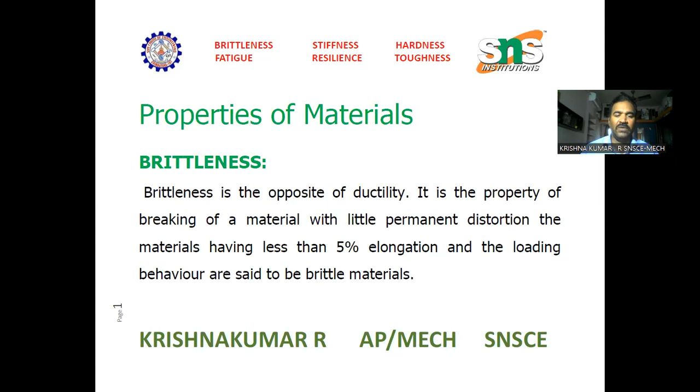Brittleness is the opposite of ductility. It is the property of breaking of a material with little permanent distortion. The materials having less than 5% elongation under loading behavior are said to be brittle materials. In this image, you can see brittle material.

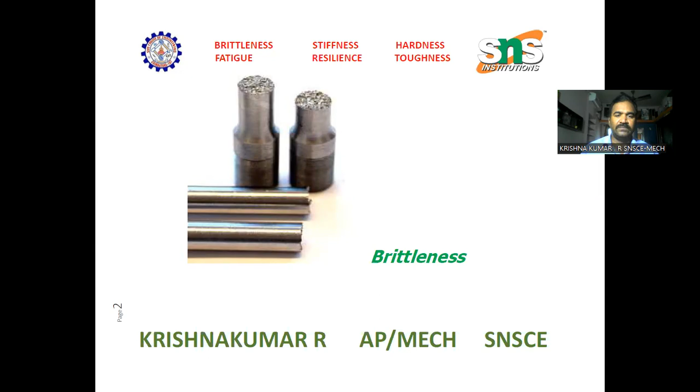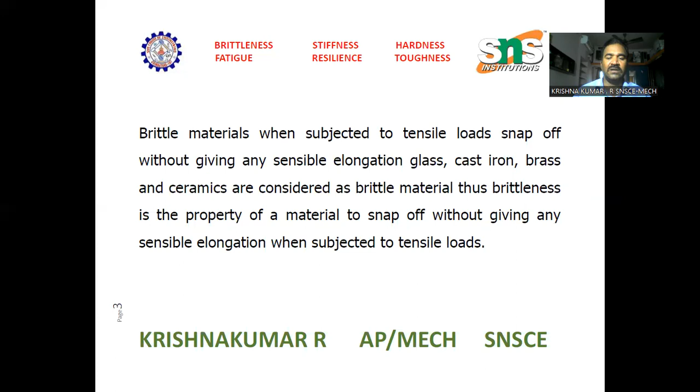Brittle materials when subjected to tensile loads snap off without giving any sensible elongation. Glass, cast iron, brass, and ceramics are considered brittle materials. Thus, brittleness is the property of a material to snap off without giving any sensible elongation when subjected to tensile load.

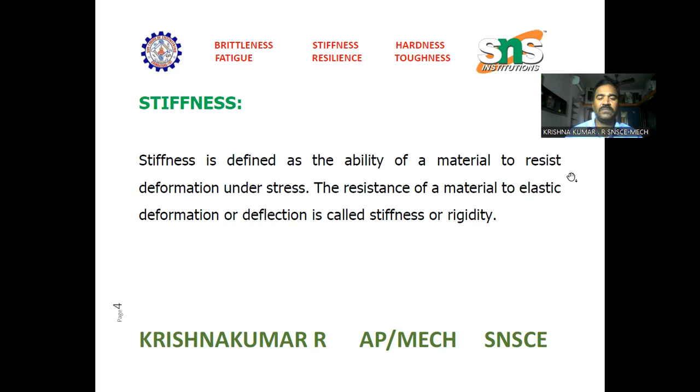Then stiffness. Stiffness is defined as the ability of a material to resist deformation under stresses. The resistance of a material to elastic deformation or deflection is called stiffness or rigidity. In this image, you can see stiffness material.

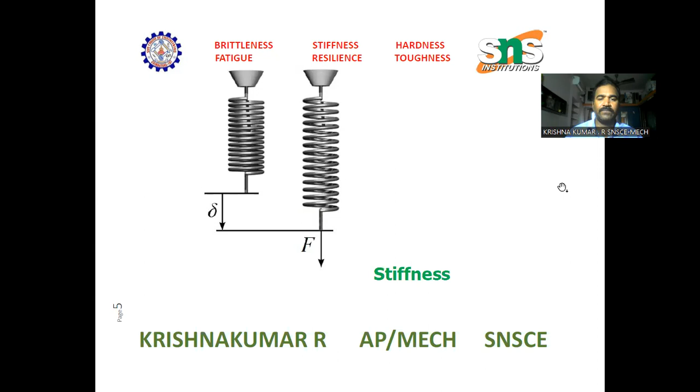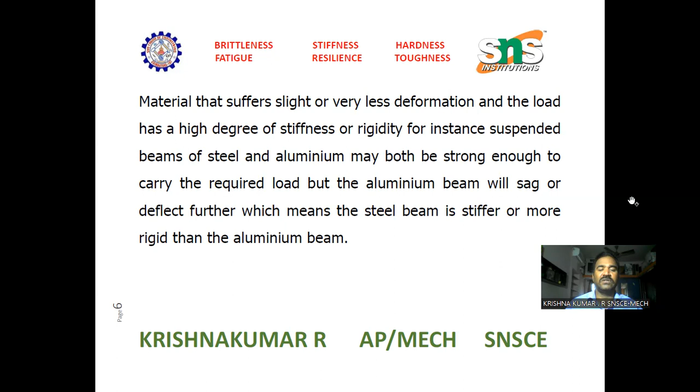Material that suffers slight or very less deformation under load has a high degree of stiffness or rigidity. For instance, suspended beams of steel and aluminum may both be strong enough to carry the required load, but the aluminum beam will sag or deflect further, which means the steel beam is stiffer or more rigid than the aluminum beam.

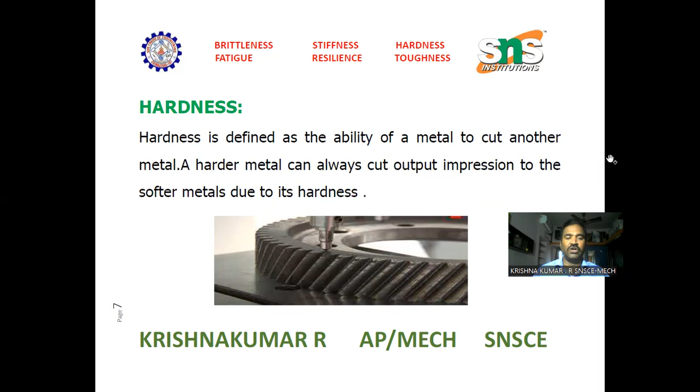Now we are going to see hardness. Hardness is defined as the ability of a metal to cut another metal. A harder metal can always cut or put impression to the softer metals due to its hardness. It is a very important property of metals and has a wide variety of meanings.

It embraces many different properties such as resistance to wear, resistance to indentation, resistance to scratches, resistance to deformation, and machinability, etc. Diamond is the hardest known material naturally.

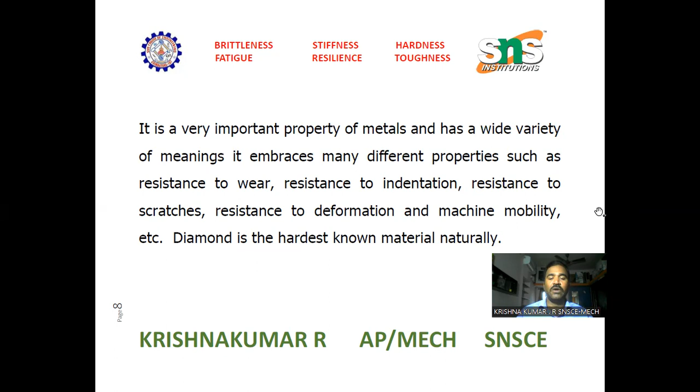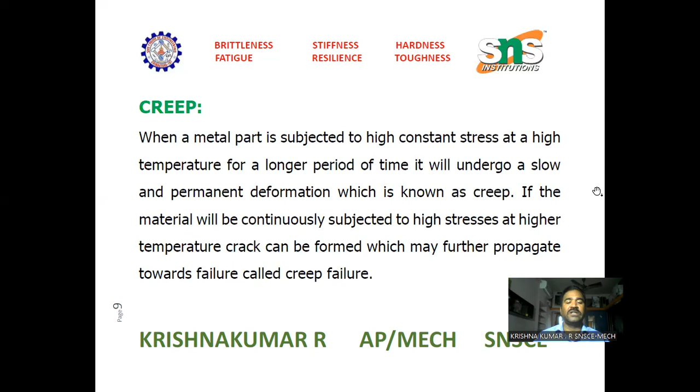Now we are going to see creep. When a metal part is subjected to high constant stress at a high temperature for a longer period of time, it will undergo a slow and permanent deformation, which is known as creep. If the material is continuously subjected to high stresses at higher temperature, cracks can be formed, which may further propagate towards failure called creep failure.

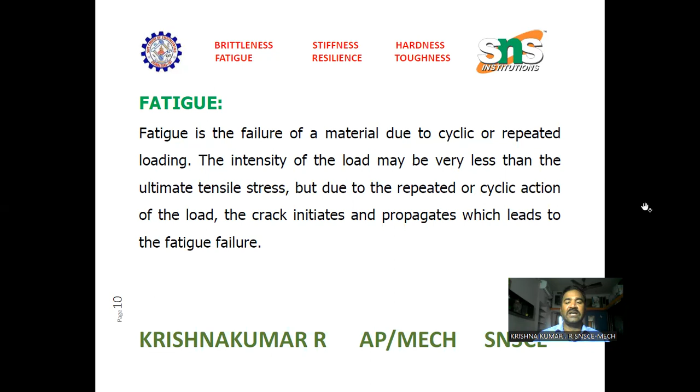Fatigue. Fatigue is the failure of a metal due to cyclic or repeated loading. The intensity of the load may be much less than the ultimate tensile stress, but due to the repeated or cyclic action of the load, the crack initiates and propagates, which leads to fatigue failure.

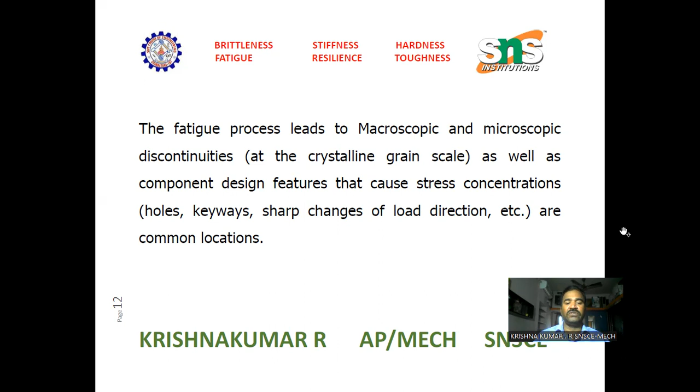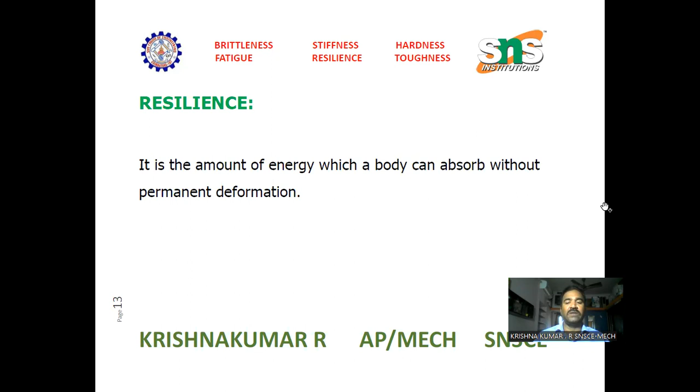Toughness: the amount of energy that a material can absorb without breaking is called the toughness of the material. In other words, it is the ability of a material to absorb energy and deform plastically without fracturing.